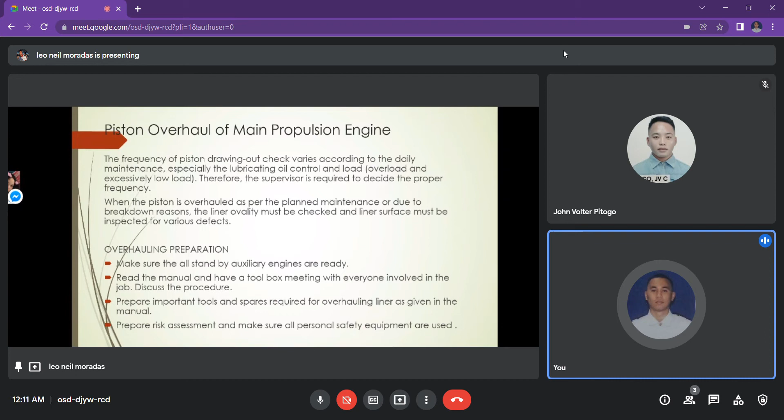Next slide, please. Next is go through the previous records or manual for clearance and adjustments.

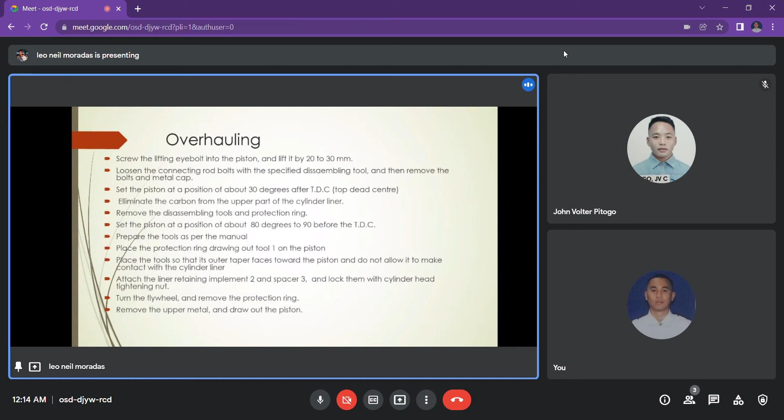Next slide. So, the next topic is the piston overhaul of diesel engine. First, let us know what is piston overhauling. Piston overhauling is done as per the planned maintenance or due to breakdown reasons. The liner ovality must be checked and the liner surface must be inspected for various defects. In diesel engines, it requires regular maintenance and attention, as minor issues can quickly lead to costly damages.

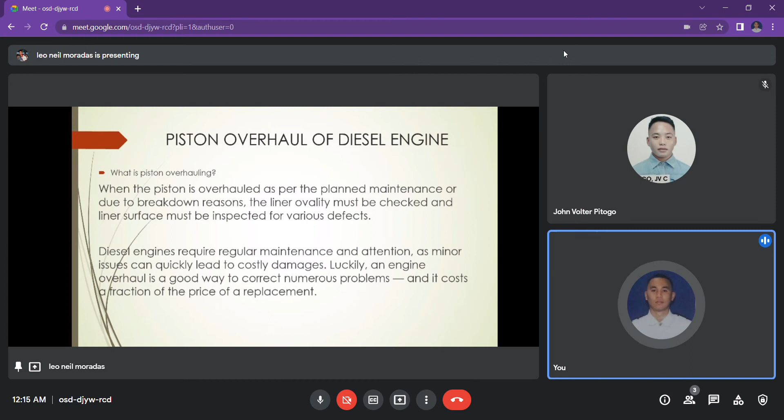Luckily, an engine overhaul is a good way to correct numerous problems, and it costs a fraction of the price of a replacement. So next, the next reporter is Pitogo John Volter. Next is the overhaul process, which involves taking the engine apart and diligently identifying faulty components.

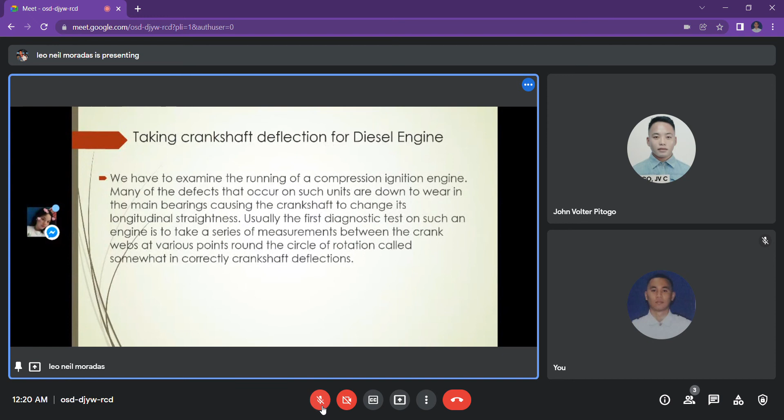So, next, if a driving engine is of the compression ignition type with a cylinder bore above about 250 mm, or 10 inches, it is also necessary to consider the alignment of the crankshaft.

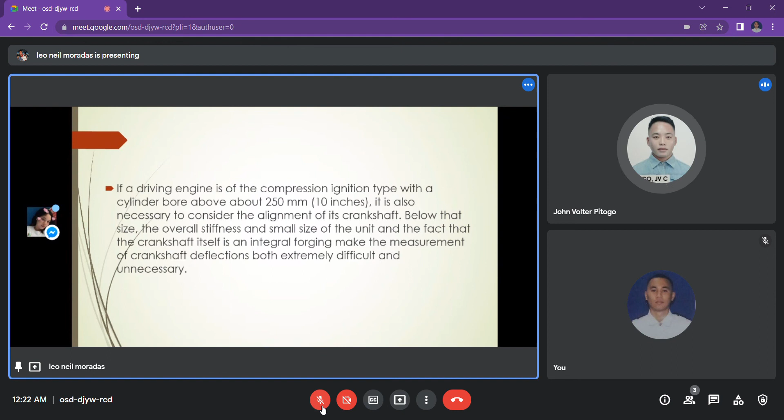Replacing a leaking mechanical seal of main engine lube oil pump. In order to understand centrifugal pump leakage, it is important to first understand the basic operation of a centrifugal pump. As the fluid enters through the impeller eye of the pump and up the impeller vanes, the fluid is at a lower pressure and low velocity. When the fluid passes through the volute, the pressure increases and the velocity increases. The fluid then exits through the discharge, at which point the pressure is high but the velocity slow.

The fluid that goes into the pump has to go out of the pump. The pump imparts head or pressure, which means it increases the energy of the pumped fluid. A mechanical seal is a device that is used to control leakage between a rotating shaft and a liquid or gas filled vessel. Its main responsibility is to control leakage. All seals leak; they have to in order to maintain a fluid film over the entire mechanical seal face. The leakage that comes out the atmospheric side is fairly low. The leakage of a hydrocarbon, for example, is measured by a VOC meter in parts per million.

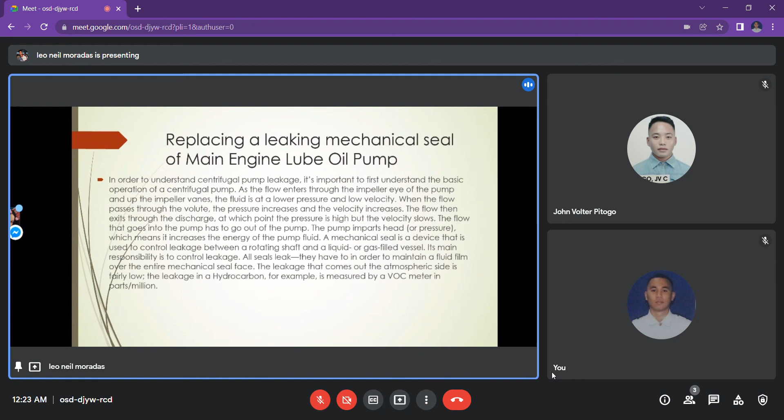So the step-by-step process to replace a mechanical seal on a water pump. Number one: what makes the water move through the plumbing system is a centrifugal pump. It has a concept of centrifugal force in the pump. A shaft spins at incredible speed and rotates an impeller. Thus, a vacuum is created through the centrifugal force which pulls water. To prevent water from entering into the electrical system, a mechanical seal is installed in the centrifugal pump behind the impeller.

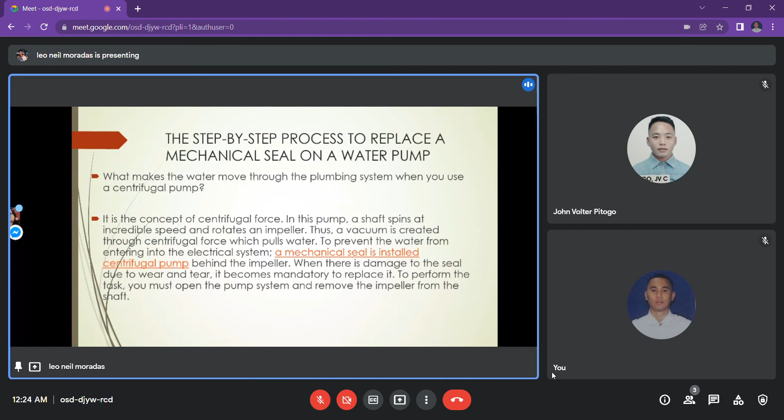When there is damage to the seal due to wear and tear, it becomes mandatory to replace it. To perform the task, you must open the pump system and remove the impeller from the shaft. Here is the step-by-step process to achieve the task. Number two: before doing anything, disconnect the pump first. Turn the power off and disconnect the pump from the electrical system. You need to ensure there is no possibility of the pump starting up while you change the seal. You should cut the plumbing tube which is connected to the centrifugal pump. Use a saw to cut it. Take the pump to a bigger workplace.

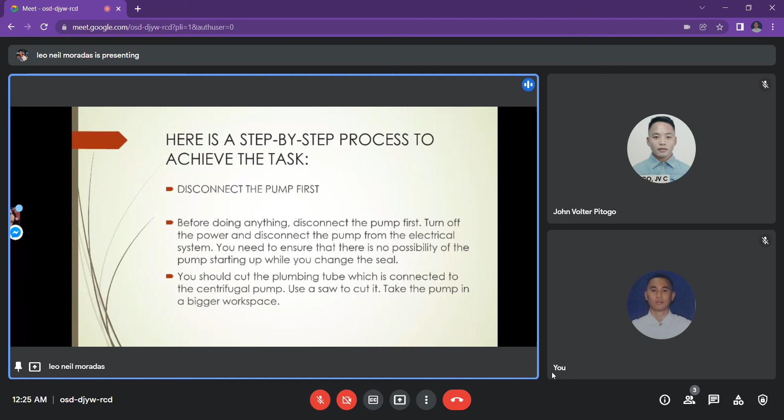Unscrew the bolts and take the pump out. Using a wrench, unscrew the pump bolts around the housing. Remove the motor from the wet end. You need to put the wrench over the motor shaft. Open the impeller by turning anti-clockwise off the shaft. Remove the seal. Take the pieces of the seal from the back of the impeller. Now slide the remaining portion of the seal off the shaft. It is time when you should keep the new seal ready.

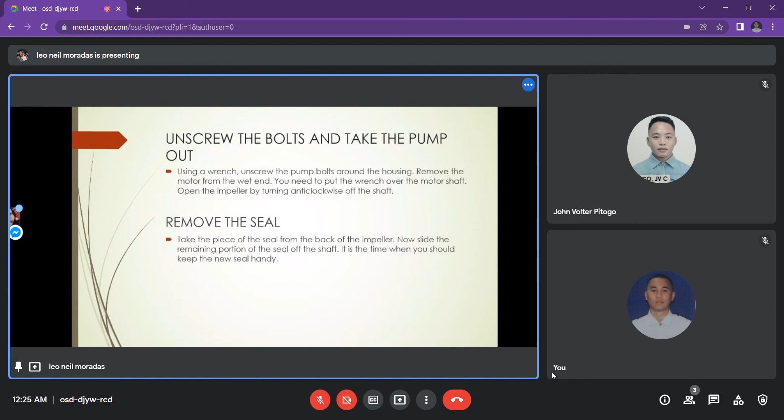Replace the seal. Take the new seal and place it on the shaft. Slide the seal gently along the shaft without touching the front face of it. The seal may not function well if the face gets body oil on it. Hence, utmost precaution is needed. Put everything in place again. The task of replacing the mechanical seal is over. Now it is time to assemble everything.

Use the wrench to hold the shaft. Screw the impeller onto the motor shaft of the pump. Align the bolt holes on the motor and wet side of the pump. Align the bolts. Place the pump in the original position. Place the plumbing and secure it using glue and primer. Let it dry well before using the pump. Make the electrical connection. The pump is ready again. I think that's all.